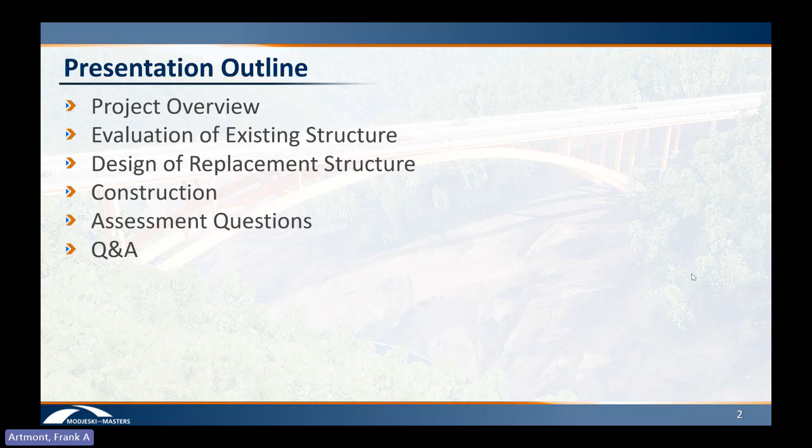I just want to mention before we move on that this project's kind of special to me. If you look at this little snippet of a hand calculation or hand sketch I did, that date is 12/7/15, and that is the first day I started working at Modjeski and Masters. So I've been working on this project since my first day at M&M. It's more than 10 years later, still working on this project, but it's almost complete -- RFI here and there -- but this project is kind of near and dear to my heart for that reason.

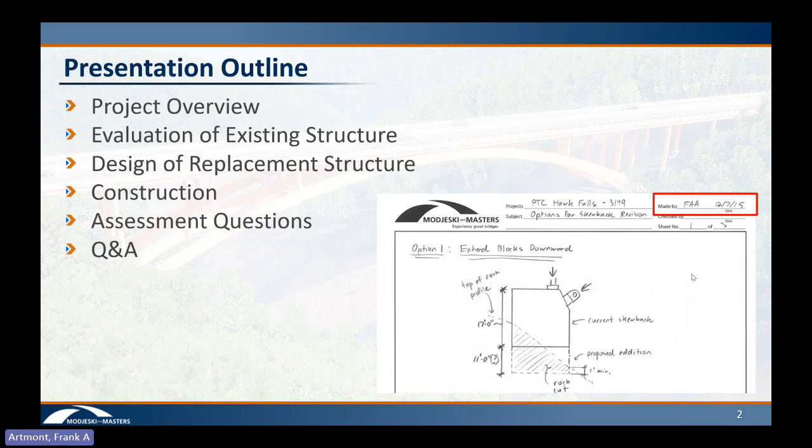So the background: this is on Interstate 476 over Mud Run, in the middle of Hickory Run State Park in Northeast Pennsylvania, about halfway between Scranton and Allentown, north of Philadelphia. If you just go up the Northeast Extension, you'll eventually get there. The bridge is named for the nearby waterfall on Hawk Run, which flows into Mud Run upstream of the bridge. If you go up there in the summertime, there's a lot of people actually swimming in that swimming hole, jumping and sliding down the waterfall, even though there are big signs everywhere that say do not swim here. People tend not to listen to that.

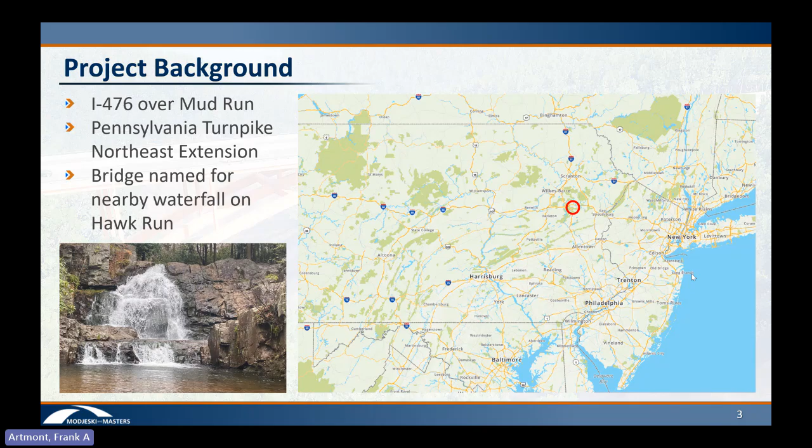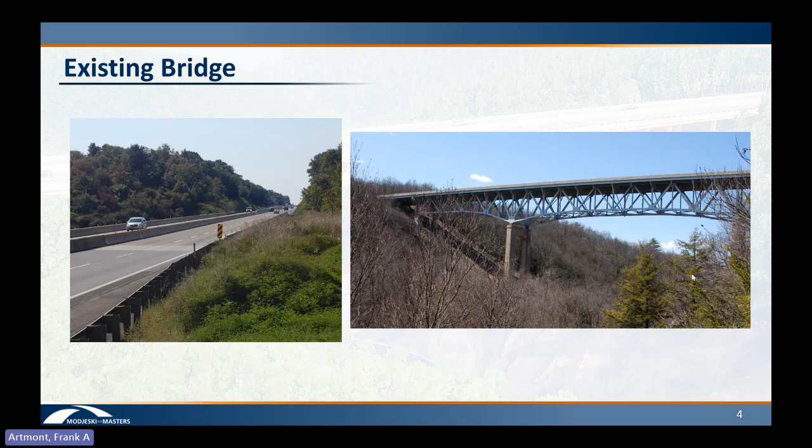So the existing bridge is a 738-foot long, 3-span deck truss bridge with I-beam approach spans. You can see some images there, both from down in the valley and from up looking down the roadway. It was designed in the 1950s by Modjeski and Masters, so this is another one of our designs -- this one was actually stamped by Frank Masters, one of our namesakes. The roadway is about 200 feet above the elevation of the stream, and this existing bridge had 2 lanes in each direction and basically no shoulders, just very, very small shoulders.

As you might expect with a 1950s truss, you can go out and look at the existing structure and see section loss in all the typical places, just above members and gusset plates. You see pack rust between the components of the members, and bearings that look not very good at all -- very corroded, not functioning as intended. There's also an interesting fact about this bridge which I notice every time I'm on site. For those who work on old trusses, there are basically three types of compression members: laced members, batten plated members, and members with perforated cover plates. For some reason, this existing bridge has all three of those. It's kind of interesting to look up and see the history of truss construction in one structure.

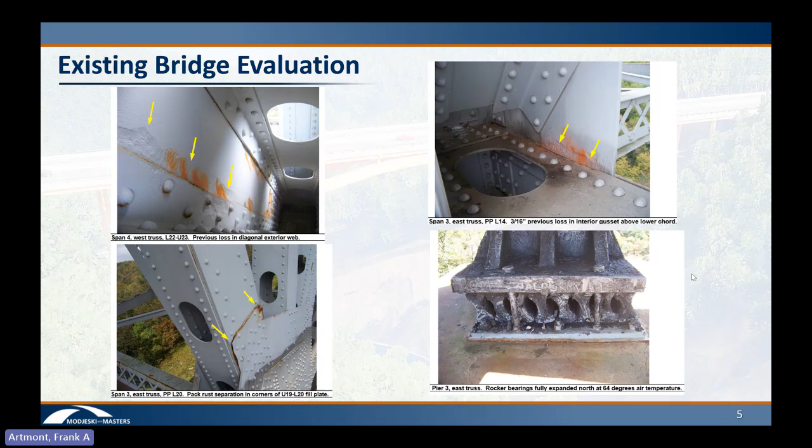So the existing structure is nearly 70 years old, probably more than that now, and has multiple structural deficiencies. The minimal shoulders make the existing bridge functionally obsolete. And because it's a truss, it contains NSTMs, which require more frequent and more stringent inspections.

Rating work was performed to examine the as-built and as-inspected capacity of the structure, including all the truss members, the floor beams, the stringers, and all the connections. From that, the necessary repairs or retrofits to carry modern loadings could be established, as well as a cost estimate.

One of the big things is that the pack rust and crevice corrosion cannot really be addressed via repairs unless you're talking really extensive work, and that limits your service life. You can use typical pack rust approaches like heating it up and hammering out the pack rust, but that doesn't work for a very long period of time afterwards.

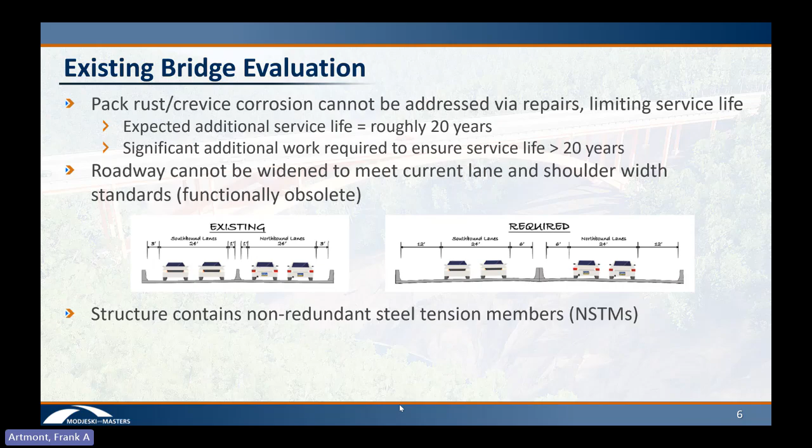So the expected additional service life would be 20 years more, and significant additional work would be required to ensure that the service life could be upwards of that 20 years. You can't really widen the roadway here to have full shoulders to meet modern requirements. And as I mentioned, the structure has a lot of NSTMs that are difficult to handle unless you do some sophisticated analysis.

So the evaluation assumed a new deck and new stringers, and required structural repairs to get a rating factor above 1.0 with current live loads for 53% of the truss members, 76% of the gusset plates, and essentially all the floor beams. The cost estimate for that was approximately $30 million back in 2012 for 20 years additional life.

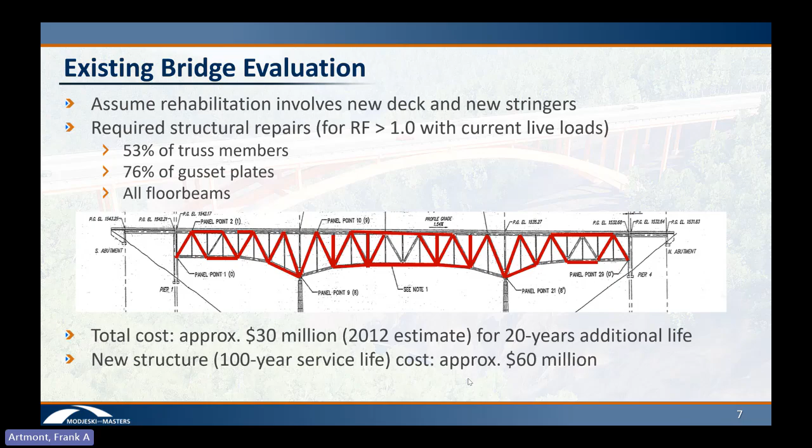Also back in 2012, the new structure, which would be designed for a 100-year service life, cost approximately $60 million. So you get a brand new bridge, you get 5 times the life, and it's only twice as much. So it's kind of a no-brainer there, why the PTC decided to replace the structure.

So for the replacement structure selection, with the evaluation performed, it was determined that a new structure was needed. Three options were investigated during preliminary design: a steel girder option, a steel arch option, and a concrete segmental option.

The estimated costs for each option were relatively similar, and the steel arch option was ultimately selected because of aesthetics and the site conditions, specifically that there was competent rock near the ground surface in the gorge, which made a really good foundation for the thrust of an arch. In addition, the arch could easily be designed to accommodate additional traffic lanes in the future if that ends up being desired.

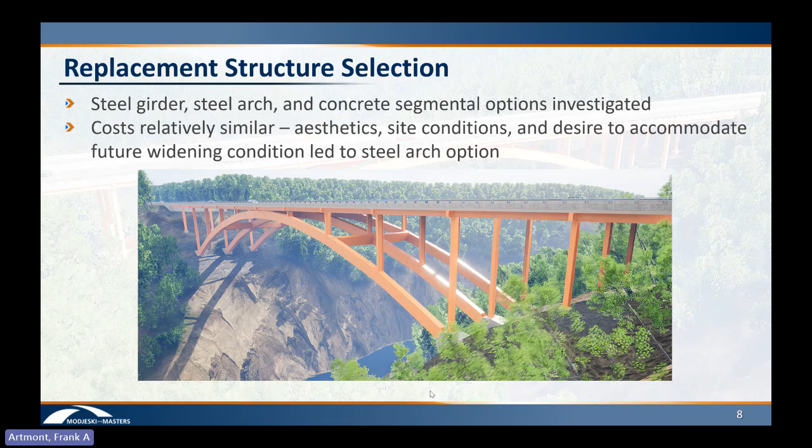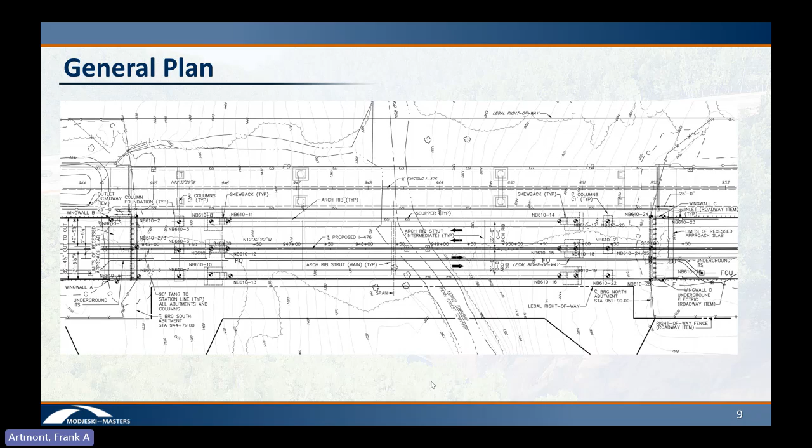So the general plan is shown here. Straight alignment, nothing too crazy. The new bridge is on an entirely new alignment to the east of the existing bridge to avoid the need for staged construction or demolition, keeping traffic flowing on the interstate and the turnpike throughout construction. The existing structure will be demolished once the new structure is built and open to traffic.

Here's the general elevation and layout of the steel arch structure. The total length is 720 feet between abutments, and the bridge is broken up into 12 60-foot panels. The arch supports the inner 8 panels. The arches are pinned at their connection to the skewbacks, or arch foundations.

That's the concrete, the big concrete wedge supporting the arch. It's pinned there so that vertical loads aren't causing any moments at the end of the steel arch rib, so you can just design those skewbacks for a directed thrust force.

The structure is essentially symmetric about midspan, except that the roadway slope is a constant 1.4% grade along the length, going from the south to the north. That results in the columns being a little shorter on one side of the middle of the arch.

Each arch rib line is made up of 11 segments. You can see the field splice segments shown in this image here. If I use my laser pointer, you can see the field splice segments, and the little splice plates are drawn. Note that as you get to the center of the bridge, they get shorter and shorter.

This is done to ensure the constructability of the structure was easy. As you need to extend a crane further out for those picks that are further out into the middle, the structure gets lighter, which makes it a little bit easier.

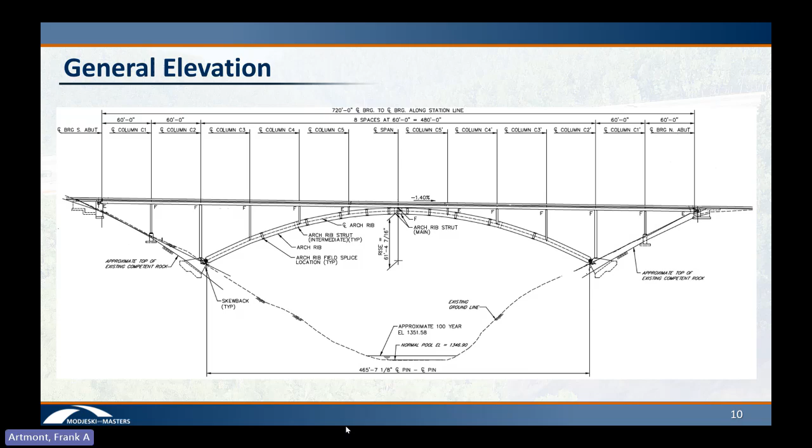The cross-section view of the bridge is shown here. It's pretty unique for arch structures in that there are 3 arch lines. Usually it's 2, sometimes 4, sometimes 3, but 2 is pretty common for most arches.

The overall load path is: the load goes from the deck into a girder floor beam system. The girders and floor beams are at the same elevation, and then into the spandrel columns that go down into the arch ribs. Off of the arch, the columns just go into foundations that are either founded on the skew back or founded on column footings further up the sides of the gorge.

All of the girders are rolled W36 shapes, and they are moment connected and continuous across the floor beams. So there's pretty big tie plates that connect the girder flanges over those floor beams.

The floor beams are built up welded I shapes. The length over the center arch is level, and then there's a break point, and then they slope downwards at 3% near the outside. This is to match the deck profile, which is a little bit more complicated of a shape. It's got a slope to the inside at the inside shoulders, but in order to avoid having to fabricate all of that into the floor beams, it generally just follows that shape.

There's Vierendeel struts that connect the arch rib lines to provide bracing rather than a typical X bracing system. This reduces the number of connections and gives a more open feel to the arch as a whole.

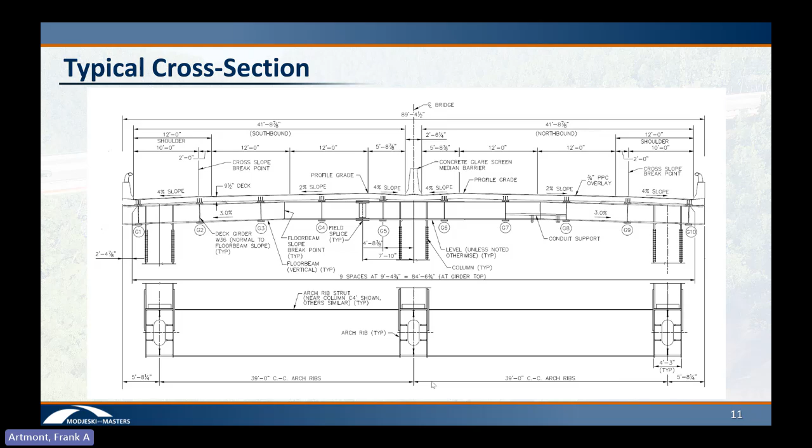Obviously this is the kind of design you do a 3D FEA for, so we used a LUSAS FEA model to develop the design forces, including dead load, cambers, live load, wind load, thermal, you name it, we did it. Beam elements are used for mostly everything: arch ribs, struts, columns, girders, floor beams, lateral bracing.

The deck is shell elements, and then the floor beams and girders are composite with the deck, so they're modeled in the same plane with eccentricities assigned using a plate on eccentric beam type of approach.

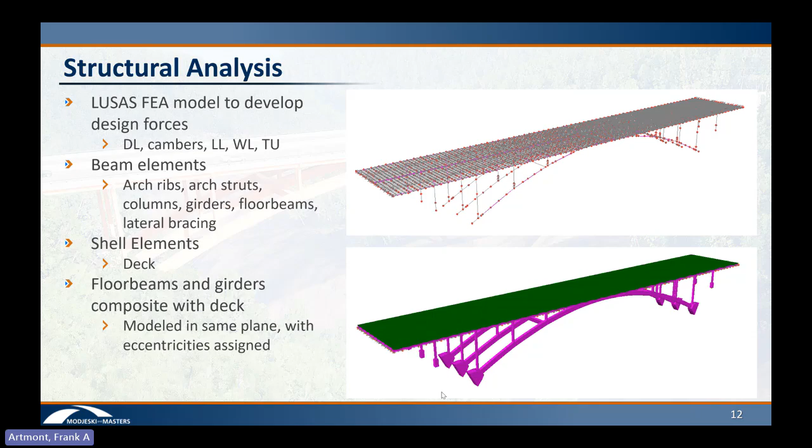Now we're going to start with the foundations of the bridge and work our way up through the design. The skew backs, which are the foundations of the arch, were cast-in-place reinforced concrete on the sandstone bedrock. While they're founded on bedrock, the bearing capacity of the sandstone was somewhat limited, and that's the reason for the extremely large bearing surface.

In this image you can see that it's 26 feet, in the front-to-back direction, and also about the same in the direction in and out of the page here. It's only a pretty small portion that ends up sticking up above the ground, as you can see in the picture on the right.

The angled surface meant that no friction was required to resist thrust — the angled back surface where it impacts the rock. But horizontal steps were provided in the bearing surface so that the skew back didn't slide prior to that arch thrust being placed on it.

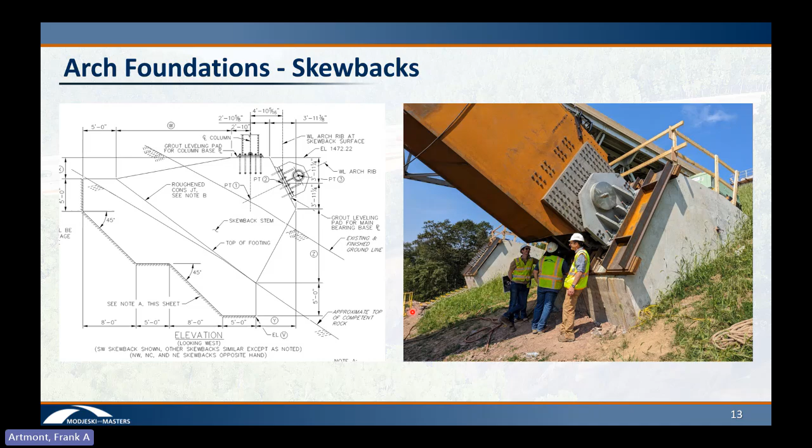The second column from each end of the bridge is also supported on the skew back directly. You can see that in the column centerline up there on the top. Most of the skew back is buried, like I said, only the stem protrudes out.

Just above this, at the ends of the arch, we have the pin bearings. These bearings were designed pretty much so that they would never need replacement, and that resulted in the use of a lot of interesting materials here.

The pin plates, which are the plates that thicken up the arch rib webs near the base of the arch, are actually A709 Grade 50CR, kind of a poor man's stainless steel. The reason for using that was because we were concerned that with moisture getting in between the bearing plates for this bearing assemblage that mounts on the skew back, it would be difficult to have that dry out, and so we were worried about weathering steel actually not being functional in there.

The base assemblage was hot-dip galvanized, and then the pin itself, the pin caps, and the rod that goes through the pins are all stainless steel. We did make a pretty sophisticated matrix here to make sure that there was not going to be any galvanic corrosion — what was in touch with what, what could be bridged over with liquid — and make sure that we wouldn't have anything trying to bleed off to protect some other component.

One thing that's unique about this is there are actually two pins. Each web gets its own pin. Usually when you see these, there's a single pin all the way across. This just made the pins easier to handle.

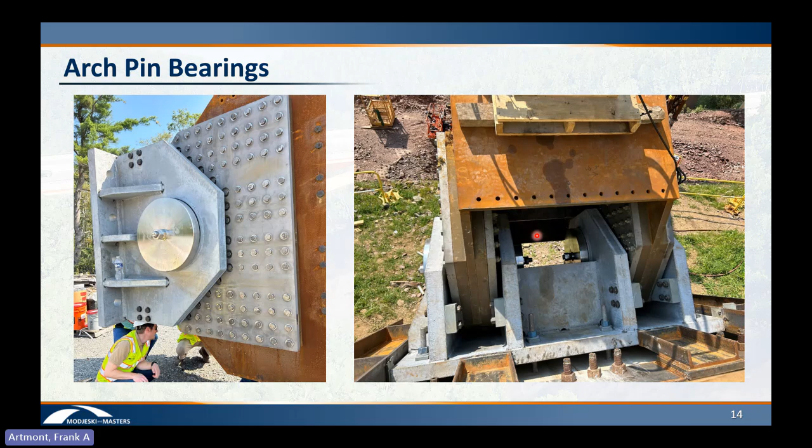The arch rib box itself was approximately 7 foot deep by 4 foot wide, and that's enough for a maintenance or inspection worker to climb through without stooping over too much. That makes it a lot easier. From talking to our inspection guys in the office, when they're crawling around or have to bend over to get through one of these all day, it really takes a toll on them. So we were trying to make it so you can pretty much stand up in this box without too much effort.

The plates which make up the section range from 1 inch to 2 3/4 inch thick, depending on the location. All of it is grade 50 weathering steel. That's the brownish color of the structure that you saw in the pictures and renderings earlier.

Diaphragms with access holes are present along the length of the structure, basically anywhere a column comes in, and at certain points to just enhance the stiffness. The typical diaphragms are perpendicular to the arch rib, whereas the ones at the columns are actually aligned with the columns. They're near vertical, so that's kind of interesting.

When you're walking through and get to a diaphragm that's slanted with reference to the arch rib, you know exactly where the column is, because when you're walking through these ribs, you can't really tell where you are. You just kind of know by the slope of the arch rib where you are, and those diaphragms.

The field splices mentioned earlier are made up of splice plates both inside and outside of the webs and flanges, and they also connect the stiffeners on each side of the splice. The splices were designed assuming all the load is transferred through the splice plates, with no load assumed to be transferred in bearing between the ends of the arch rib segments.

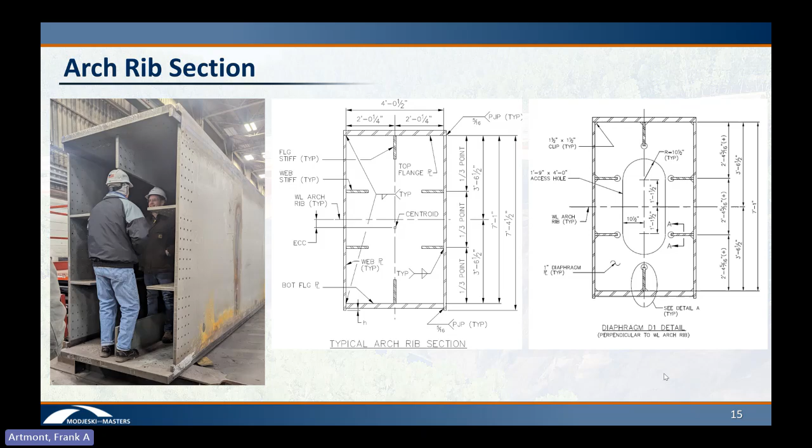If you need to slightly kink the arch at a field splice, you can't really do that if you have it milled to bear and you're taking a lot of force through just the bearing of one arch rib segment on another.

So the arch analysis and design, setting up an efficient arch shape requires development of the funicular polygon. This is kind of the way they did it back in the day before computers, and calculations, and we still do this to get the most optimal arch shape. One way to think about this is an arch is somewhat just an inverted chain.

We do that basically the same way with the arch rib, although it's flipped over and all the forces are in compression instead of tension. What this does is that if you set the shape right, you don't end up with moments under dead load. So under dead load, your arch is just resisting compression, and then you have all that moment capacity able to take non-uniform live load.

For the Hawk Falls Bridge in particular, the shape was approximated using a series of circular curves with different radii, and then there's a transition at each column location where there's a lot of load coming down. That minimizes the amount of moment that we have to carry through dead load.

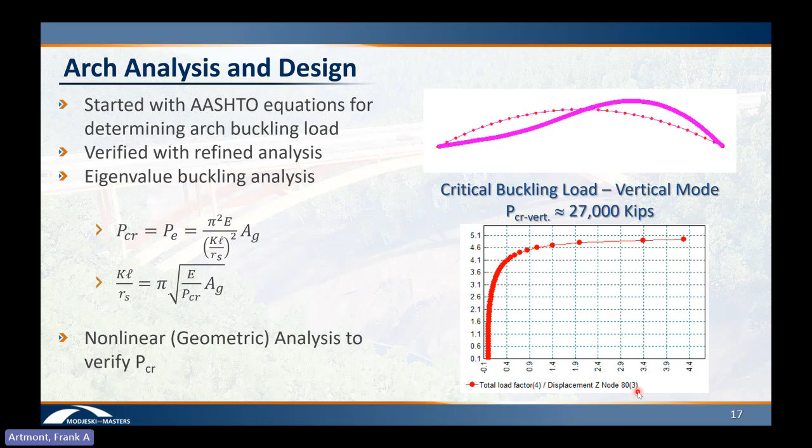One of the other things we looked at is buckling, because it's a compression member. We have to make sure our buckling calculations are up to snuff. We started with the AASHTO equations for determining the arch buckling load, then verified that with refined analysis. One thing you can do is an eigenvalue buckling analysis, and your software will give you a P critical value, which you can plug right into the AASHTO equations for elastic buckling strength. We also did nonlinear geometric analysis to verify that critical buckling load, and found about the same result.

So the system of the arch ribs - we went with no X bracing to improve the aesthetics and make the structure a little more efficient, and you can see in the rendering how open the structure becomes below the deck. There are 8 strut pieces connecting the arch rib lines, 4 intermediate ones right here and some on the other side, and then 4 more, 2 pairs of 2, right up at the crown. They're all Vierendeel braces, meaning they brace primarily through bending stiffness, so the connection between the strut and arch rib is a moment connection to get that moment stiffness.

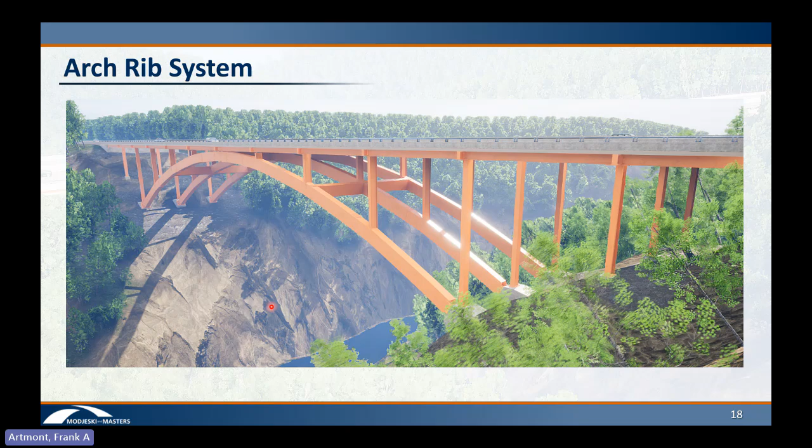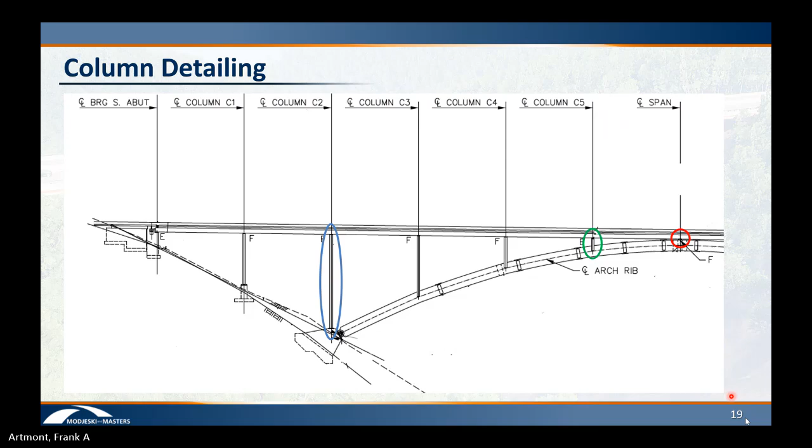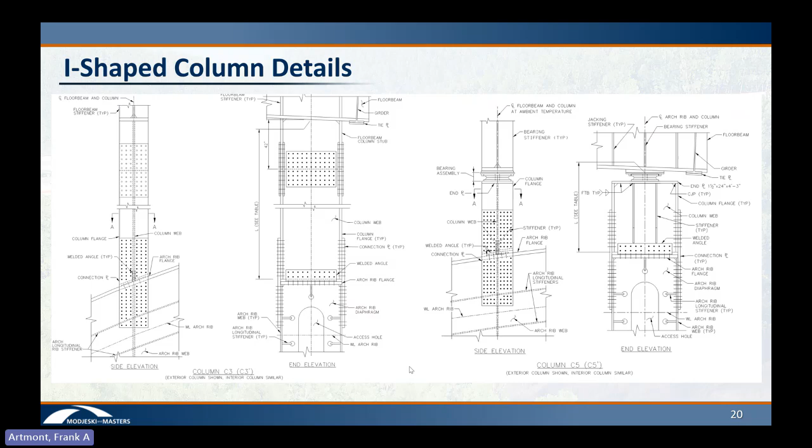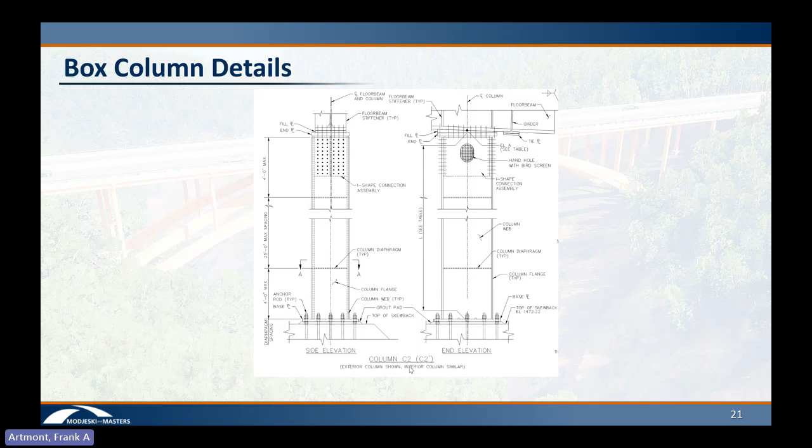The box column details look very similar. However, the base connection - this is where we're on top of the skew back - is just a typical base plate connection with grout below, leveling nuts, anchor rods, that sort of thing. Up at the top, there's an I-shape bolted onto the bottom of the floor beam that then slides into the box. This was the best way we could think of to make this connection while still having it be adjustable depending on the position of the superstructure after construction.

At the crown, so at the exterior and interior arches, there were bearings. At the exterior arch, there was no need for any kind of bolster or anything - the superstructure is almost sitting just right on top of the crown of the arch.

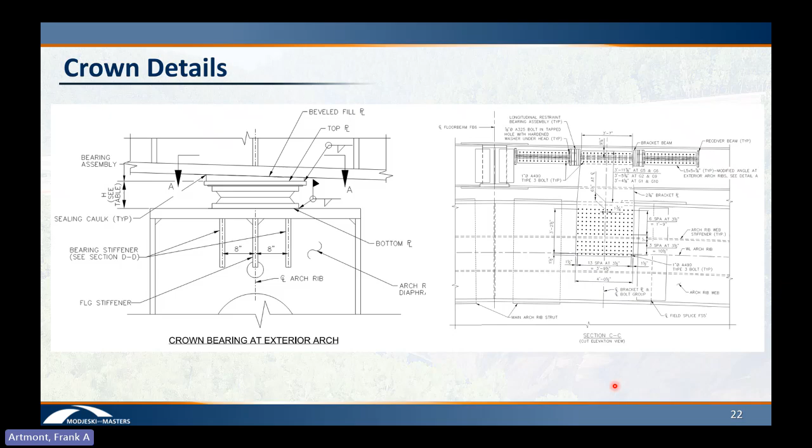At the interior arch, which I don't have shown, there's a bolster that raises the bearing up to the bottom of the floor beam. So the longitudinal fixity is not taken by the bearings. It was a lot of force that was needed, braking and also the kind of restraint of expansion and also live load.

So all of that needed a pretty large restraint system to keep the deck longitudinally fixed to the arch. We creatively called this system the longitudinal restraint. It's shown in this section here. It's basically a large, thick plate that is bolted on each side of the center arch, and it goes up, and there's some beams between some of the girders and the floor system, and some bearings there that allow some sliding back and forth if needed, and everything's kind of fixed longitudinally right there.

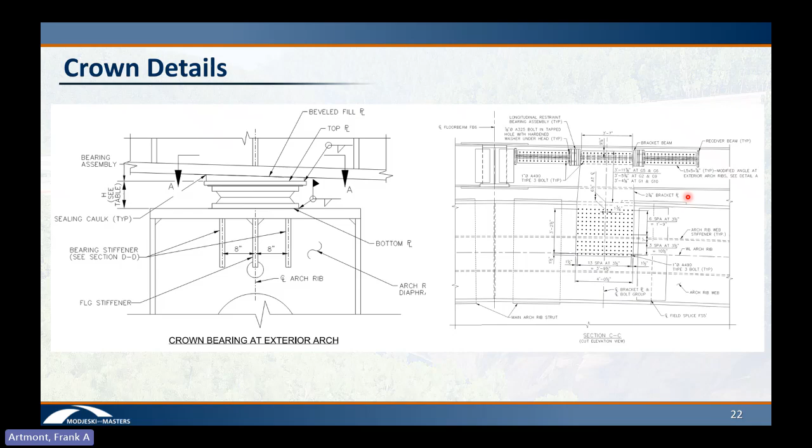So the framing of the floor system, the girders are spaced at 9 foot 4 3/4, and as I mentioned before, they're W36 beams. The floor beams are spaced at 60 feet and were welded I-shapes, and the girders were continuous across the floor beams.

To avoid an NSTM designation for those floor beams, since they are spaced at pretty far lengths, we did do a system redundant member analysis. That's a pretty sophisticated nonlinear analysis where you essentially fracture the floor beam and ensure that the load can be carried elsewhere by other members. And we were able to do that. So these floor beams don't need the typical NSTM type inspections.

There's also a lateral bracing system provided here, which is designed to transfer all the wind loads. However, once the deck is on the bridge, that's going to take most of the wind load. But we did design that just in case the bridge ever needed to be redecked or anything like that. That's always there to take the loads.

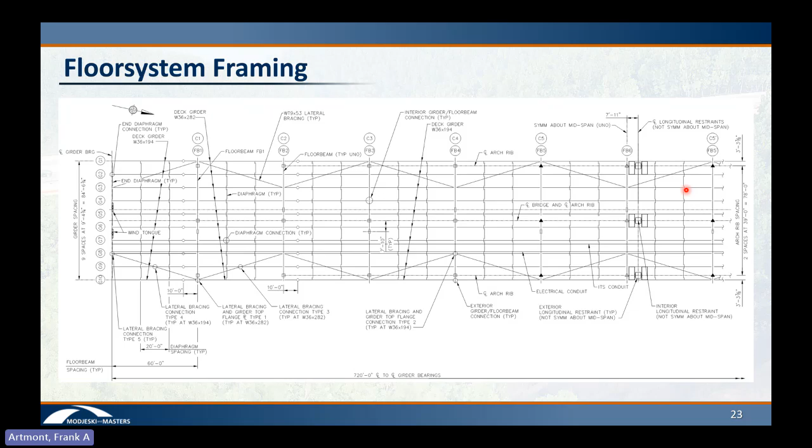So one of my favorite things to say when we're talking about a big bridge design is wind tongue. At the ends of the bridge, rather than depend on bearings to take all of the lateral load from the floor system, the deck, the barrier, whatnot, all that wind load, and even some wind load from the arch that gets transferred up the columns, we designed this wind restraint system, or what we call a wind tongue. There's a receiver that's mounted in the abutment, and then some tongue plates that are mounted on the end of the diaphragm. These are pretty big welded assemblages. They allow sliding in the longitudinal direction, but transversely, it becomes the fixed point for all of the transverse loads on the superstructure.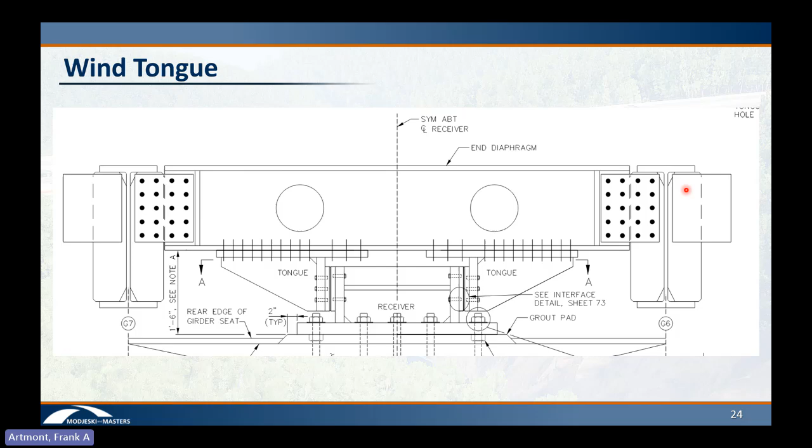So I mentioned up front that this bridge could be easily widened. For this, the PTC usually typically plans for widening to the inside, which would have required 2 bridges here. But the better solution for this case was to widen to the outside. Originally, when we started the design, it had 2 arches, and then during widening, another 2 arches would need to be placed on the outside.

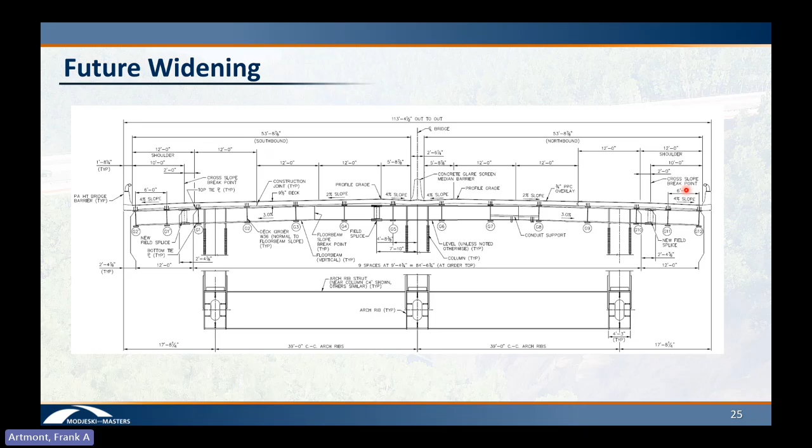However, because of the need to not have to go through a lot of the permitting processes with the bridge being in a national or a state park, we decided that it would be easier up front to just design the 3 arches, the foundations, and everything for the widened condition. That's why a permanent arch rib got added. Whenever the PTC is ready to widen this area, that would just be done by bolting an extension onto the end of the floor beam, and that's where your additional shoulder comes from. And then what used to be the shoulder becomes the 3rd travel lane in each direction.

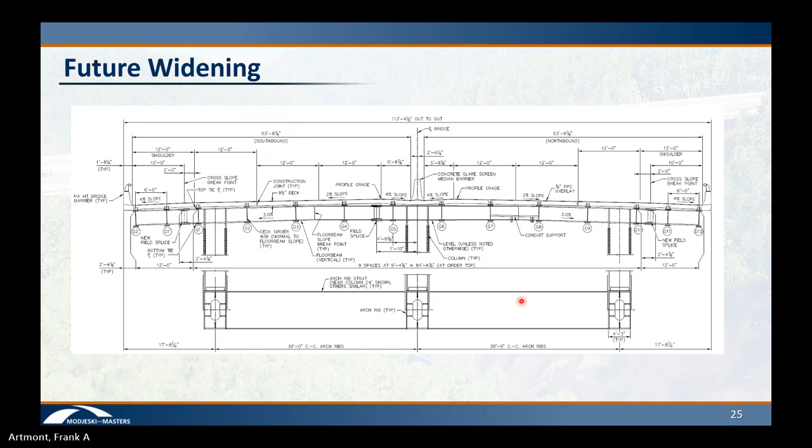So now I'm just going to pop through some of the renderings that we had, before construction started, just from different angles, so you can get a better idea in a 3D way of what the structure looks like. Then after this, I'll hop into construction and do about 15 minutes on that.

Part of that is due to adding the third arch rib line for additional widening, moving some of that work ahead until now. Steel fabrication started in late 2021 and continued through Q2 of 2023.

Substructure construction started in the second half of 2022 and was substantially complete by August 1st, 2023. The first arch rib segment was set September 7th, 2023, and the final intermediate struts at the crown of the arch system were set on June 10th, 2024.

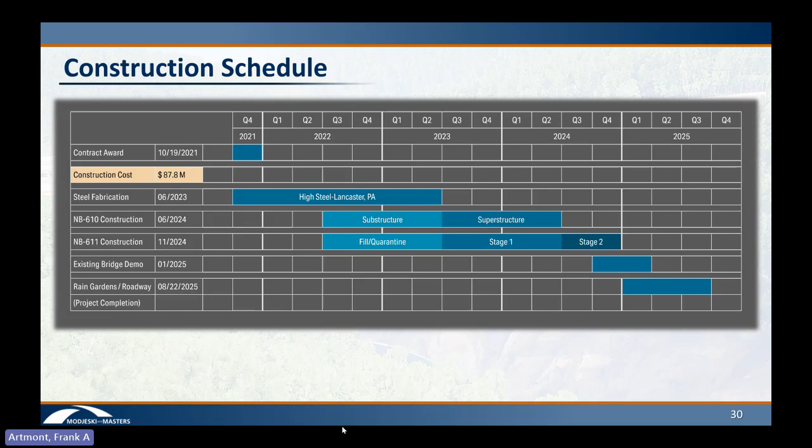The bridge deck was poured in spring of 2025, and traffic started using the bridge, I believe, in August of last year. Completion of construction is expected by the end of this year, including demolition of the existing bridge and all the cleanup that goes along with that.

The construction methods here are a little different than what we anticipated during our design. The design is on the left there, and what we anticipated was trying to stay out of the gorge as much as possible. So we had some temporary stay towers mounted on top of that second column, the one over the skew back, with stays that would adjust the height of the arch rib and cantilever out from there.

However, the contractor, Trumbull, who won the project, had some large temporary falsework towers left over from previous work. They felt more comfortable using those and adjusting the geometry with them. So they went ahead and got all the permitting done for their temporary foundations, and ended up just supporting it from below, as shown in the image there.

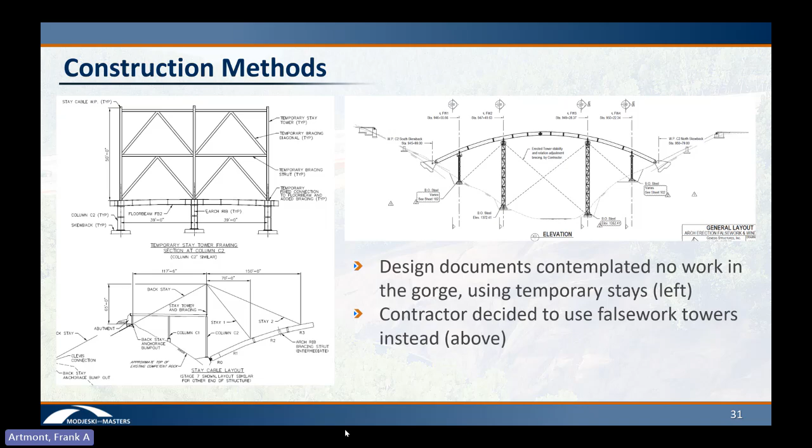That plan obviously required a lot more work in the gorge than was originally anticipated. They had to cut access roads down the sides of the gorge, and that was another reason the construction ended up a little behind schedule. Both our original and Trumbull's modified construction scheme required the use of two really large cranes behind the abutments.

The contractor used two of these Liebherr LR 11,000 cranes. You try to get an idea of the scale from these pictures, but until you're standing next to one of these things, you don't really realize how large they are.

Each of these cranes took upwards of 50 truck deliveries just to get the pieces on site to assemble them. It's hard to get a sense of scale from the ground, but during a site visit, that picture in the middle is showing us walking along the crane boom as it was lowered to the ground.

They had a pretty strict wind limit they didn't want to exceed, around 28 to 30 miles per hour. Anytime the wind was going to get above that, they would have to bring the booms down, and that wasn't like a 10-minute move—it was more than an hour to get the boom out of the air and down on the ground.

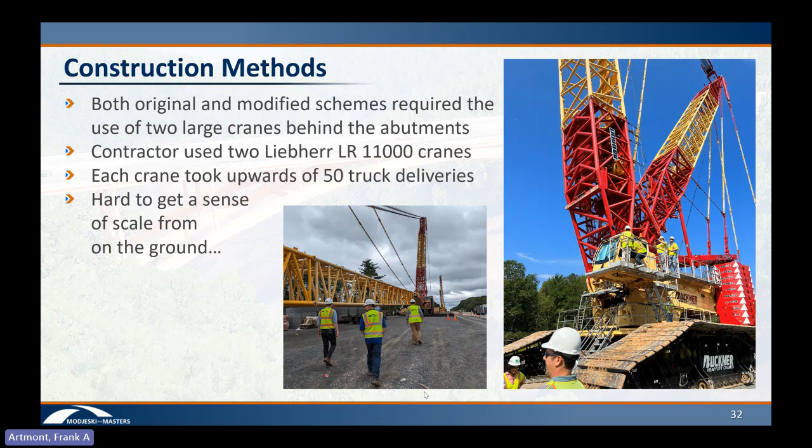It's hard to get a sense of it on the ground, but when you start looking at these things from the air, you get a much better sense of how large these cranes actually are. They had enough reach with no load on them that the tips of the two cranes could touch over the middle of the crown of the arch if they needed to.

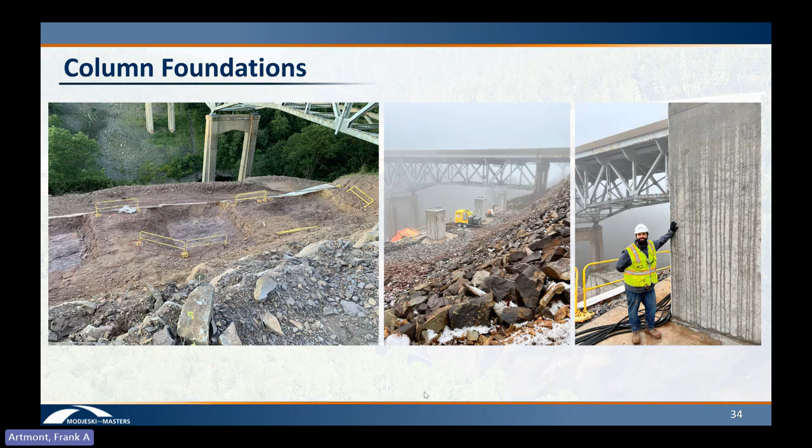The skew back construction was largely the same as for the columns. They got down to rock, and we actually had in the plans to pour a 6-inch Class C concrete mud mat to protect the bearing surface. When they got down there, they had trouble getting the rock to come out in the shape we needed, because it was sloped differently than the skew back required. They eventually used shotcrete for some of these rather than trying to form and pour the Class C, but that all worked out in the end.

So here's a, on the left there is shown one of the skew backs before they buried it. You can see very, very large mass concrete pour.

On the right, they had an issue with one of the concrete plants during one of the pours, and they didn't get enough concrete to finish the whole stem. We had to do some calculations to show that would be okay. But because of that, we had the chance to actually crawl down in the cage when we were there for a site visit. So this is inside one of the rebar cages. I mentioned mass concrete - you can see the black hoses there, which would be used for coolant during the mass concrete pours.

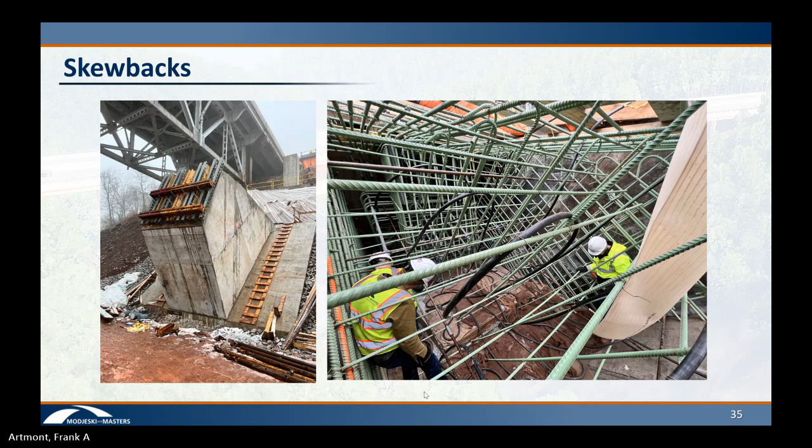The abutments are pretty typical Pennsylvania abutments. They did use the PennDOT drain trough detail. And although we did use strip seals for this bridge, we took a belt and suspenders type approach, figuring they're strip seals, they're going to get pulled out by a plow or otherwise dislodged in the first 5 years. And then what happens to the water? So the strip seals were actually placed behind the abutment right over this drain trough, and if any leakage were to happen, it's going to go into the drain trough and drain away from the steel.

Walls were needed to support that trough, and you can kind of see those in the left picture, at least the reinforcement there. On the right is when they started backfilling, but the back wall of the trough hadn't yet been poured.

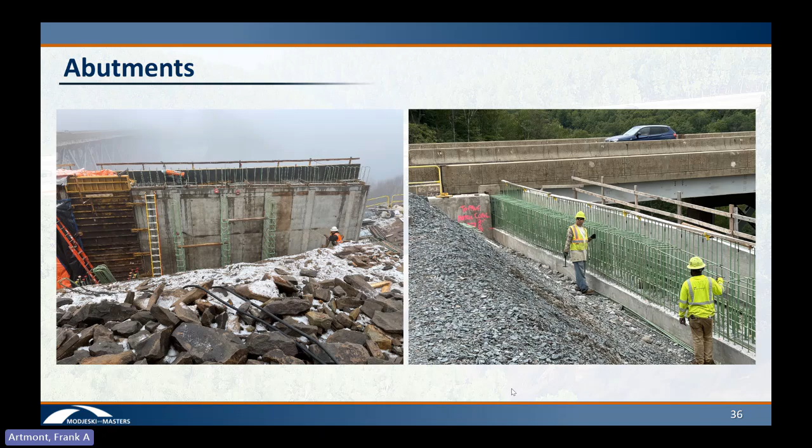Steel fabrication - this was High Steel in Lancaster who did this work. On the left, it shows a picture of an arch rib with just the webs on only. You can see all the diaphragms, and you can actually see where one of the column diaphragms is because it's sloped - it's this one right here, I believe. You can see all the cutouts for the stiffeners that had to go in. On the right, you can see the end of one of the arch ribs with the holes drilled for the pins, obviously before the pin plates get put on.

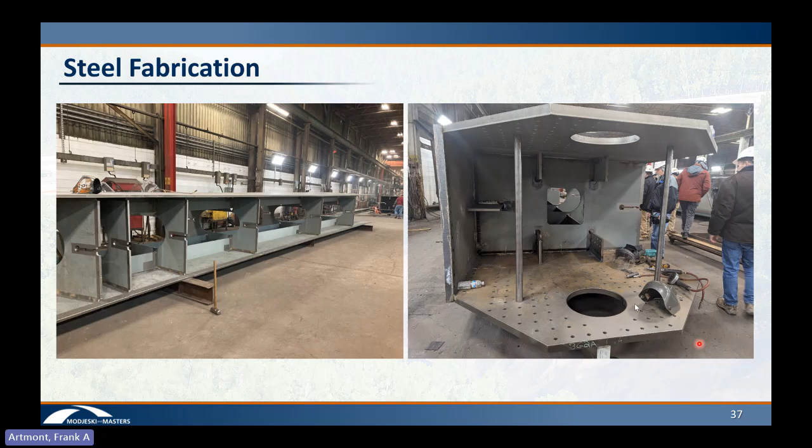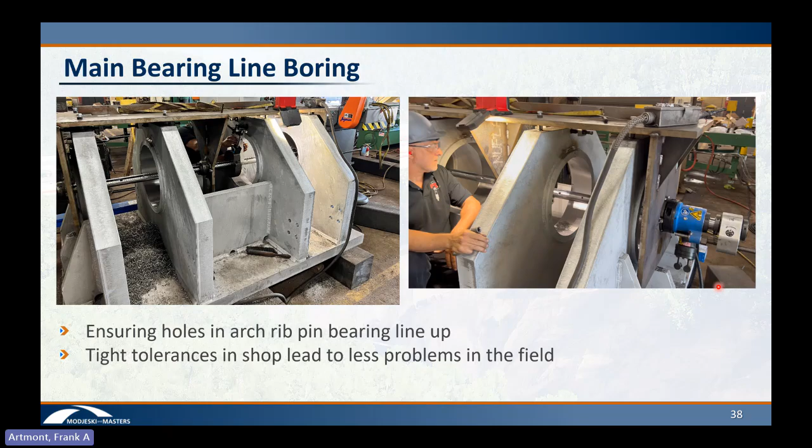We did have them actually line bore all of the holes for the pins. This is a line boring operation, so they're spinning down and making sure those holes are a precise diameter. They did this all at one time to make sure that all of the holes were aligned properly.

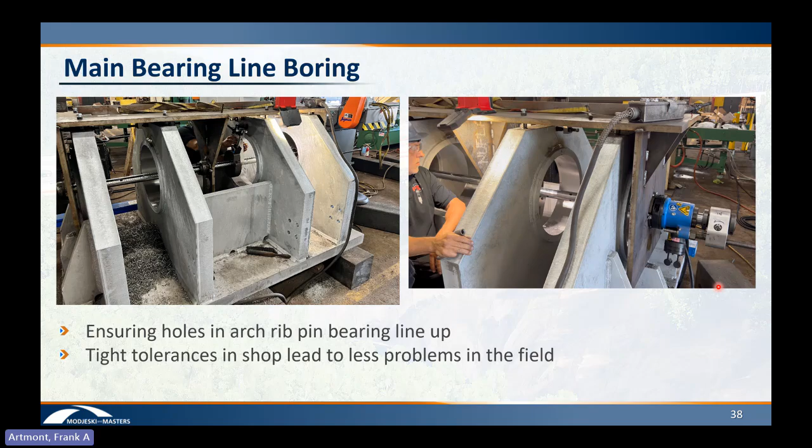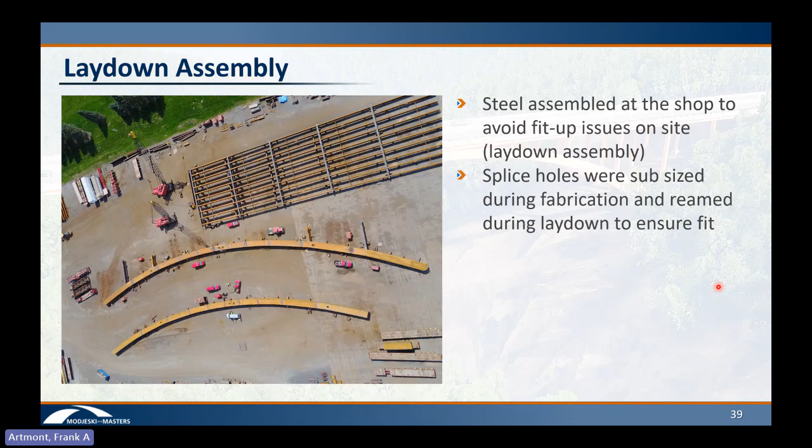High Steel did a full laydown assembly in the yard, so this is a drone picture courtesy of them. You can see that they laid down the arch ribs and assembled them all together just to make sure that everything would fit in the field once they got up there. They also did a full floor system assembly too, and that's in that picture as well. All of the splice holes for the arch rib were subsized during fabrication and were reamed during this laydown to ensure that everything fit correctly.

Steel erection - the end of the arch rib, or each of the arch rib segments, was lifted into place by a crane, and then it was held on the crane until a sufficient number of bolts was installed to allow the crane to release. The process was repeated until the strut location was reached, and then the struts were installed and bolted up between arch lines. Once all of the arch rib pieces were in place, each half of the arch rib system was lowered, rotating about the base pins until they mated near the crown, and then finally the struts at the crown were installed and bolted up.

The way they did that is, once they built enough arch rib segments out to the first tower, they would keep going to the second set of falsework towers. And then at the second set of falsework towers, the first set of falsework towers would be disengaged. So they had pretty reasonable control to be able to lift the arch ribs up and down and make sure that the center crown lined up.

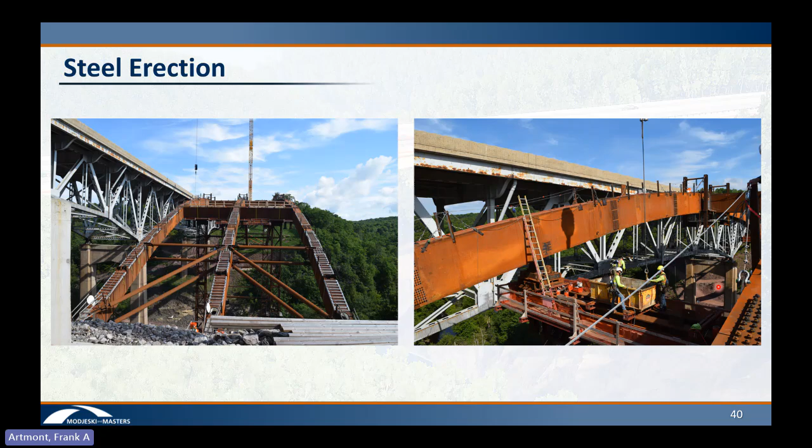Genesis Structures did the erection engineering for this. They had a lot of temporary works to be able to push the arch ribs around as needed to get everything to line up. When you're building from one side of a 480-foot gorge to the other, you've got to make sure you're pointed in the right direction to end up at the right spot at the crown without having to put too much locked-in stress into the arch ribs.

So here's a video I took.

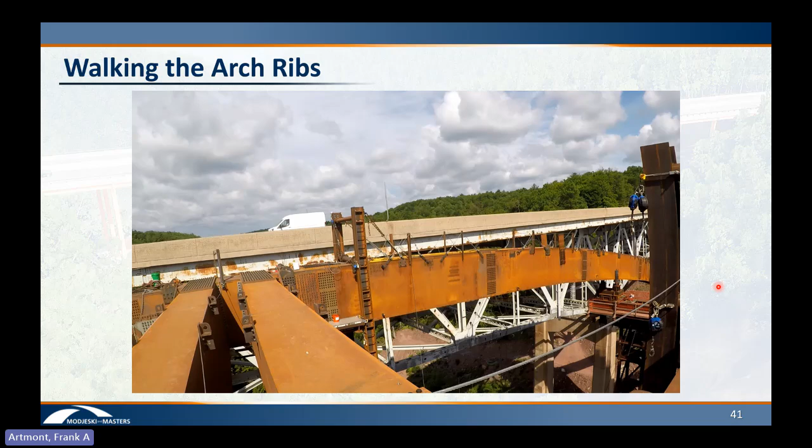We had the opportunity to go out before they started putting the floor system and columns on. This was just after they had closed the arch ribs. This is me with a GoPro on my chest walking around the arch ribs up at the top of the crown. You can see the existing bridge there, and a lot of the pack rust and whatnot.

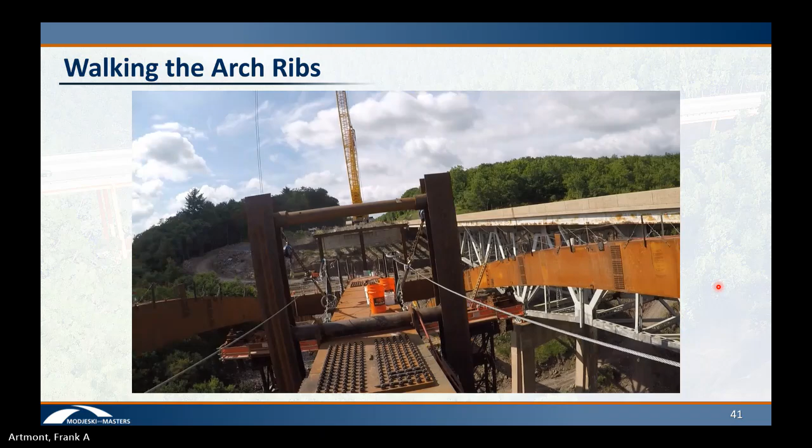They designed these pretty cool temporary platforms. You can see them there, that they actually just rotated with gravity. They were able to adjust them with come-alongs to be able to get down next to the arch rib and bolt all those bolts up, and also underneath as well.

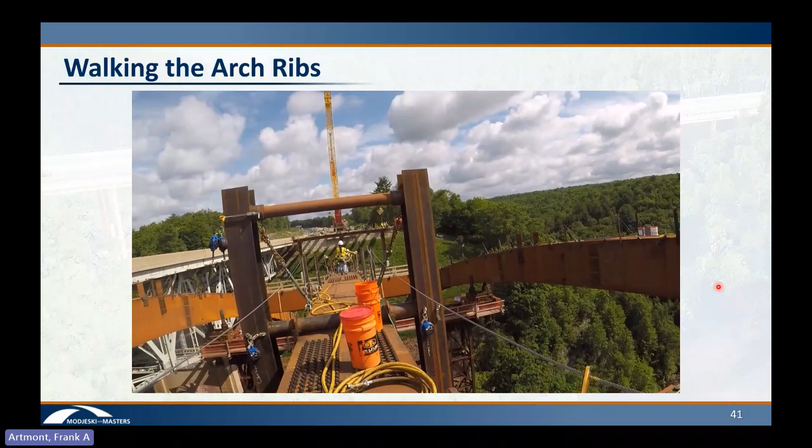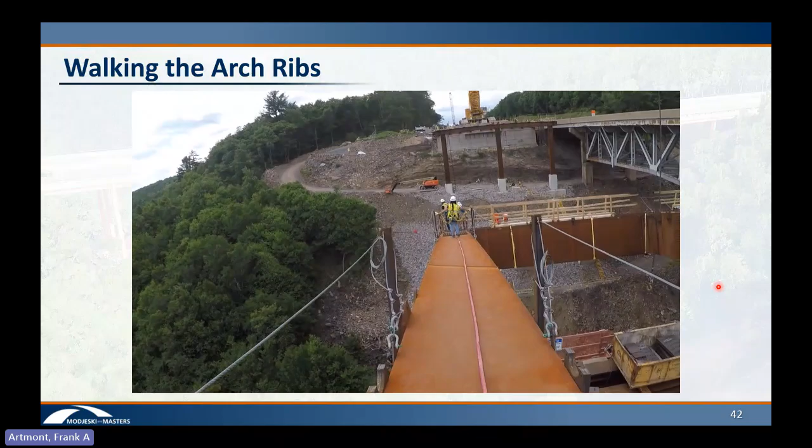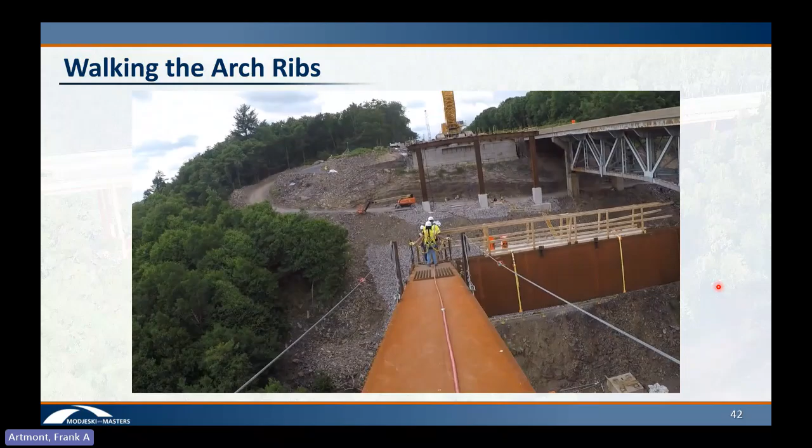Here's another video kind of walking down. You can see the first set of columns there off of the abutment. They actually erected the floor beam and some of the column frames all at once while they had the large cranes on site, which made it pretty easy to make sure everything was lined up correctly. They also erected full sections of floor system in the same way, as long as they had the large cranes on site to do that.

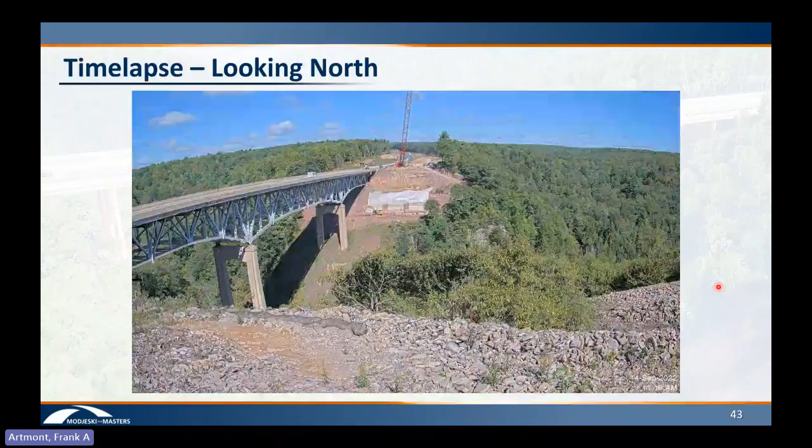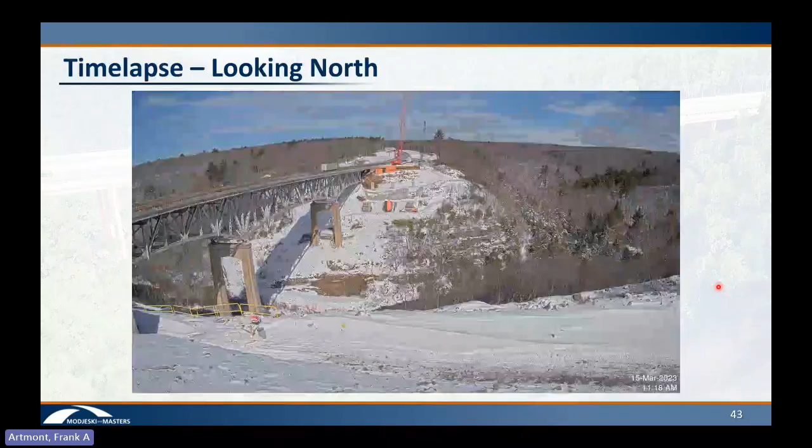Now I'll play a time lapse. This is looking north. It isn't the full construction, but it gets through most of the superstructure. You can see here they're digging the foundations and pouring the skew backs. This is basically one shot every day at around noon, so it's rather fast, but you get a scale of the advance of construction as time goes on.

If you look down in the gorge, you can see them digging one of those foundations out of rock for the temporary towers. Here's some temporary towers going up, the first set. They started setting arch ribs at this point.

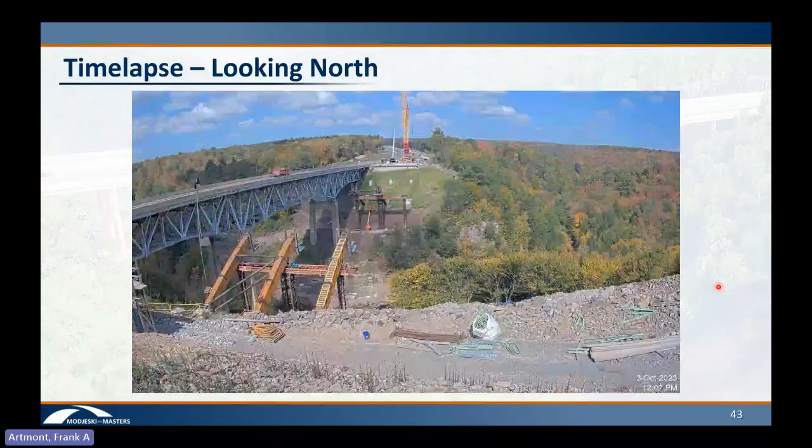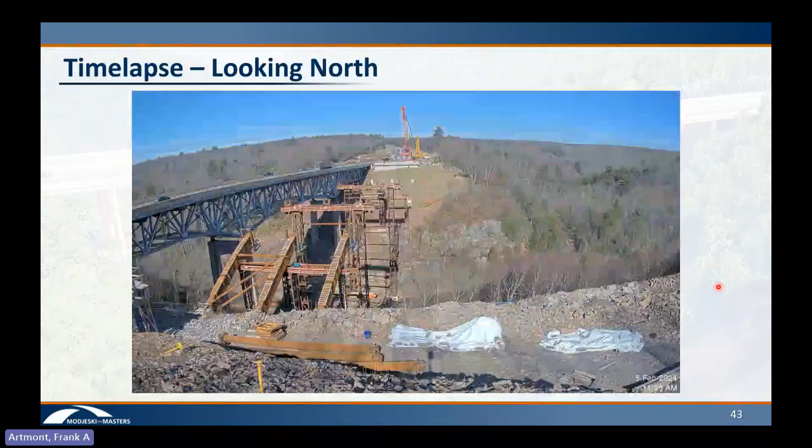Now there is a stop here. We did have some concern when they set one of the first arch ribs that it was twisted a little bit. We weren't quite sure if that was a fabrication issue or something else. There was a lot of discussion between the contractor, the erection engineer, and us over what should be done. Eventually the contractor decided to go forward with it, and everything made it up in the end, so it seems like High Steel's layout did its job.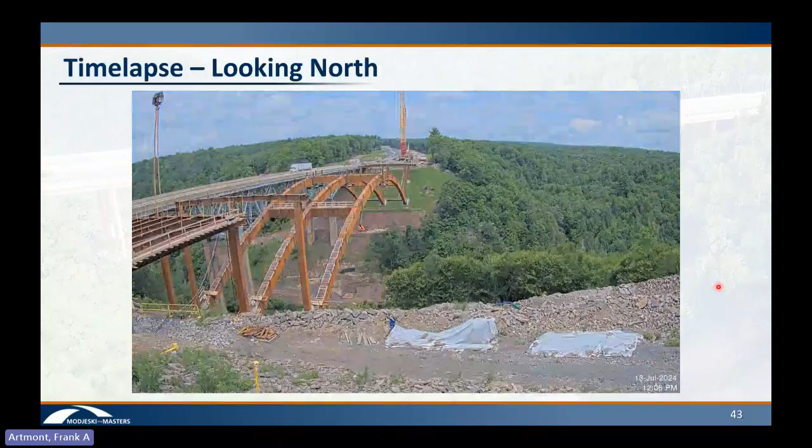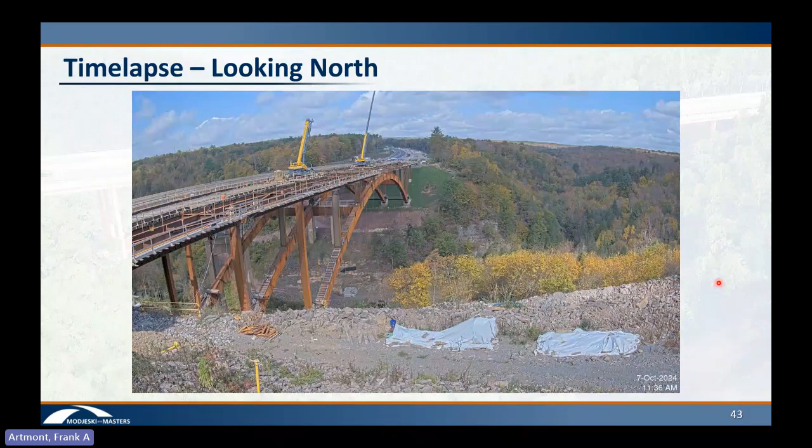If you caught it there, which I wanted to point out but kind of missed - there's a point where you can actually see the arches lower down, and that's when they're closing the arch rib. I think you can see it in the next time lapse looking south, and I'll try to point that out when it happens.

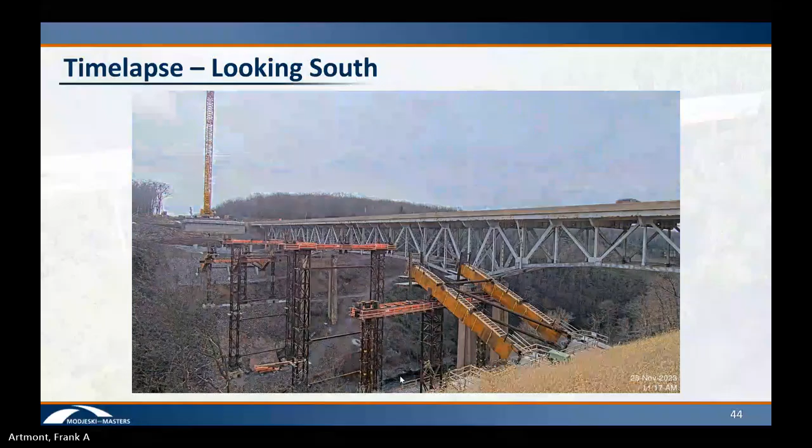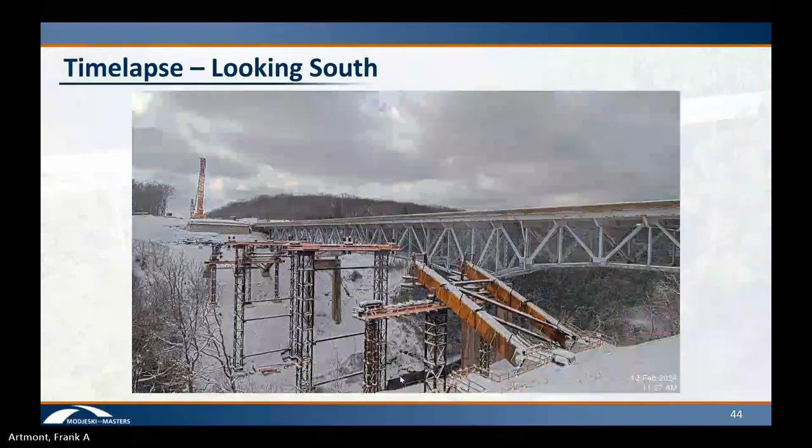I do apologize. I was just thinking maybe the time lapse might not be playing very well on your end. I'm not sure, hopefully it is, but if not, I apologize for that.

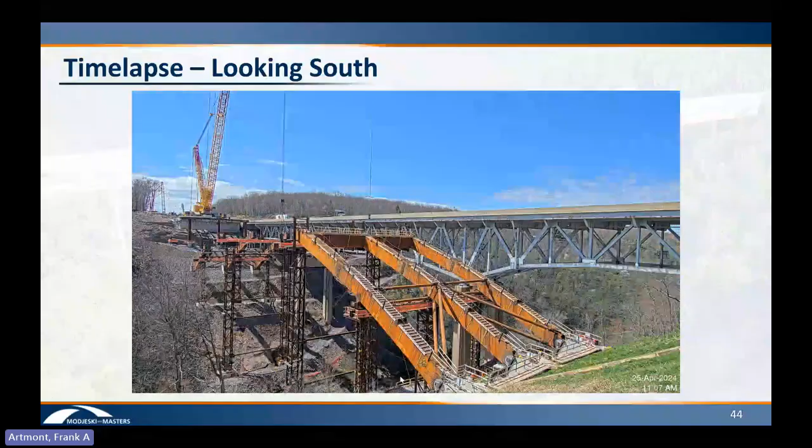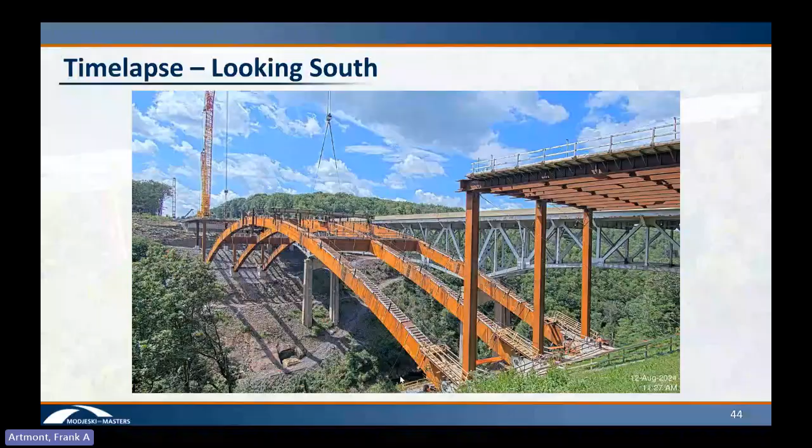You see here they're putting the intermediate struts in, and all the other arch ribs are going in. Once they get up to the crown, if you watch closely, you'll see the arch lower right there - that is when they lowered all the hydraulic jacks at the falsework towers and lowered the crown into position. Here you can see them erecting floor system pieces.

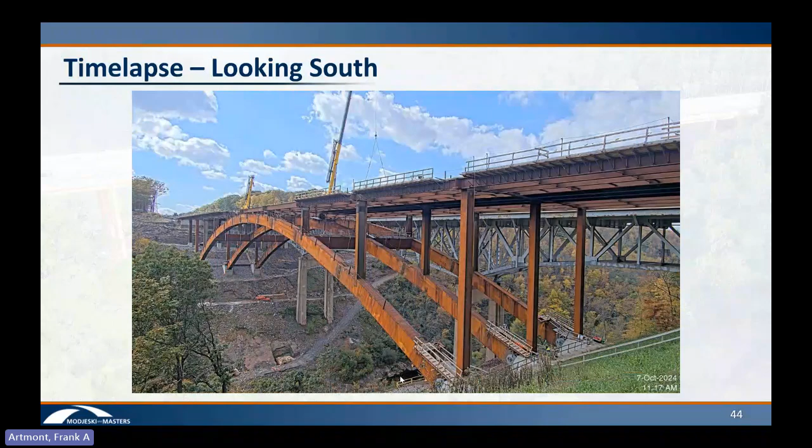They eventually did get rid of the large cranes and disassemble them, and then did the rest with either rubber - I believe they were all rubber tire cranes on crane matting out on the superstructure to erect the other stuff.

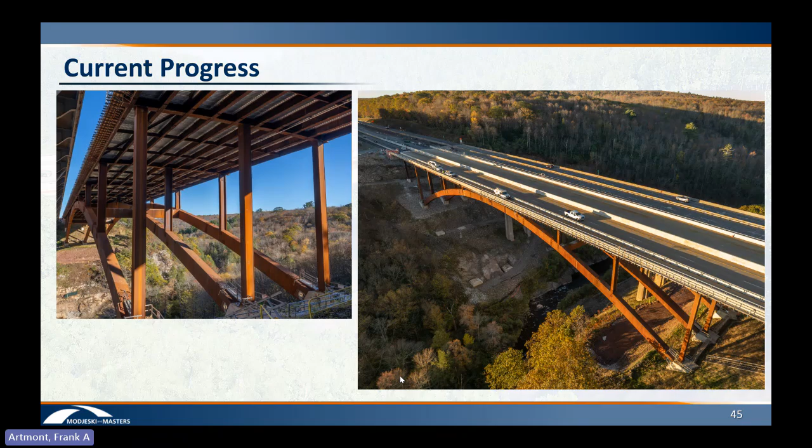And then finally, I'll wrap up with the project team. Obviously the owners, the Pennsylvania Turnpike Commission. On the design side, M&M is the EOR on this. Benesch did our roadway. American Geotechnical and Environmental Services did the geotechnical. AD Marble Lotus did the environmental work. Corven, now part of H&H, did the concrete concepts for the preliminary design, basically the segmental option. Moving into the construction side, the CEI was STV, and Trumbull was the general contractor. High did the steel fabrication, and Genesis Structures was the erection engineering.